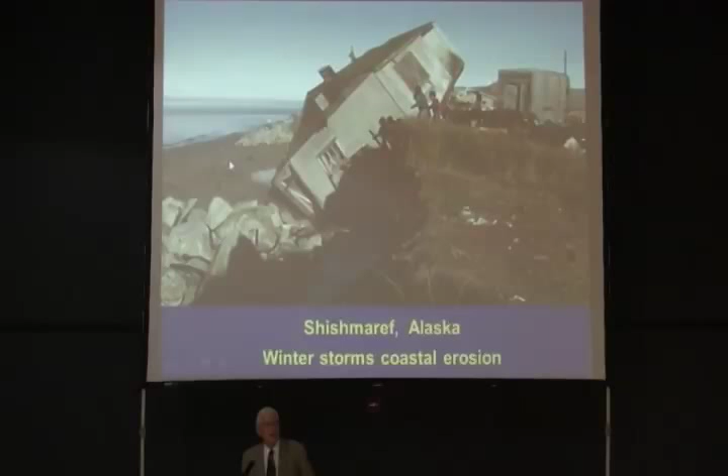Climate change has caused two reproductive seasons for the spruce bark beetle that's wiping out the forests. The ice goes out earlier in springtime, exposing the coastline of Alaska to winter storms, and we're losing probably 10 coastal villages.

This has had a profound effect upon me, a guy who's lived in Juneau, Alaska the last 43 years. I've concluded that our responsibility as human beings, engineers, energy professionals, scientists and business people is nothing less than converting the world's largest industry, energy, from about 85% fossil fuel to at least 85% renewable source energy, literally running the world on renewables as fast as we can, prudently and profitably. There may be some nuclear.

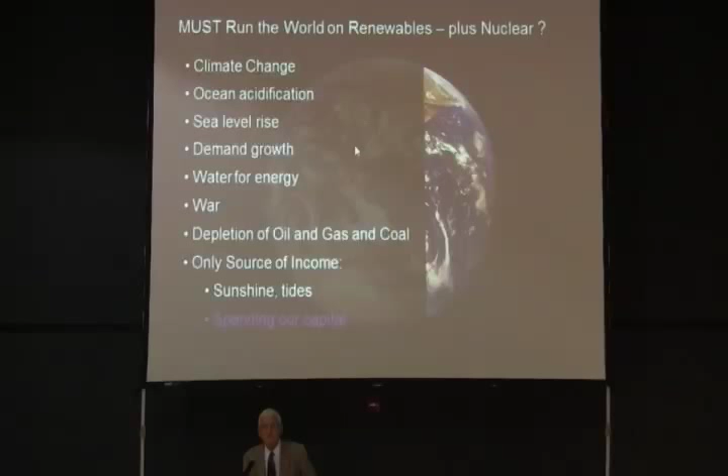It's very hard to predict that now because these problems have become emergencies. We need to move from spending our capital - eventually you'll go broke, what does that mean for our civilization - to running on income.

The only income we have on this planet is solar energy from the sun. This is humanity's total annual energy use, and this is the annual energy input we get from the sun.

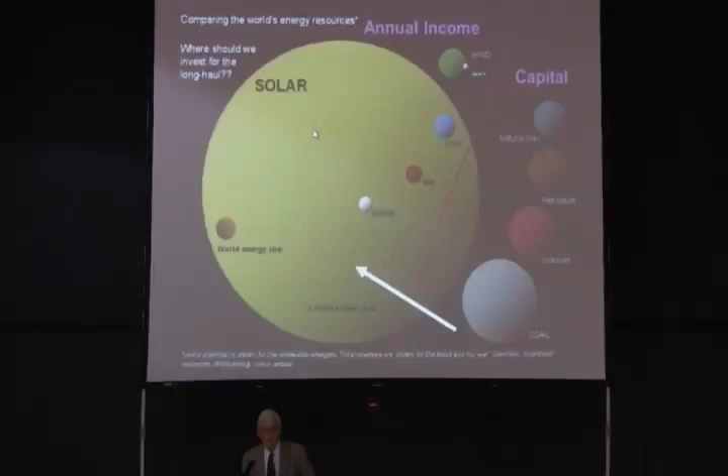I often title my presentations at scientific conferences, like the American Society of Mechanical Engineers, as Running the World on Renewables, Alternatives to Electricity. I ask, can we do this? Can we run the world on renewables entirely with electricity, transmission, storage, and integration?

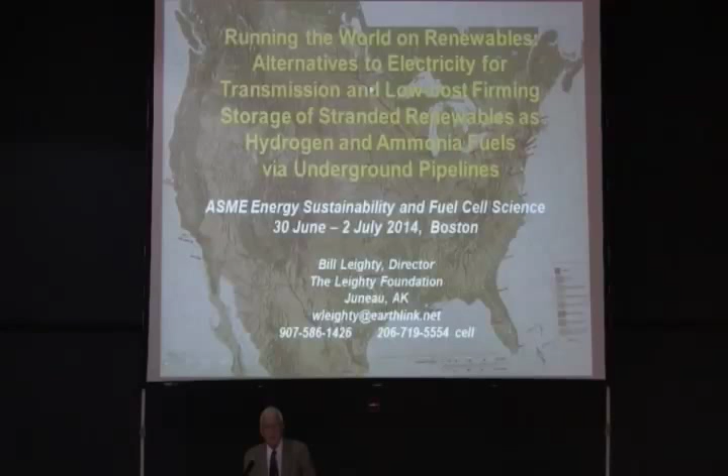And if not, at this time we should at least be seriously considering alternatives - moving that energy around and storing it very inexpensively as hydrogen and ammonia fuels.

The trouble with renewables, of course, is that they're dispersed - they're all over the countryside. There's a very high gathering cost, and then they're remote where the richest resources are, so we have the transmission cost. And they're time varying in their output, intermittent some have said, so we have the firming storage problem.

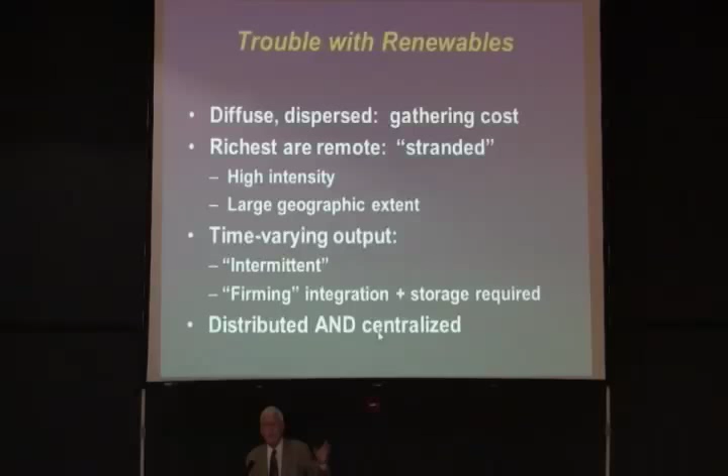In the future, we're going to use both distributed - that's the PV on your garage roof and mine - and centralized large solar and wind plants for running the world on renewables.

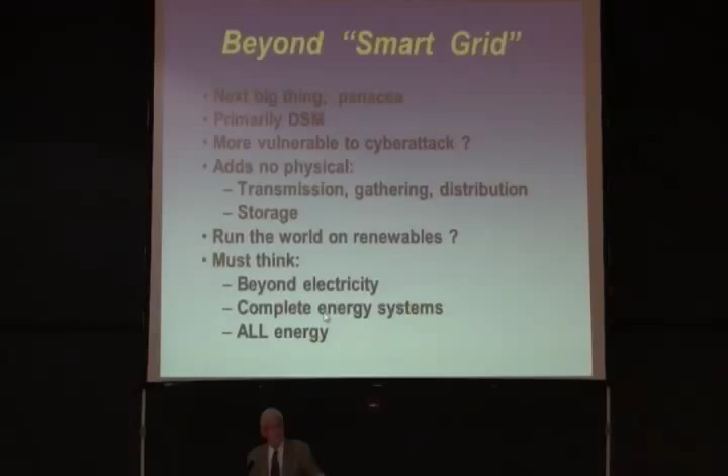Nobody wants to buy a kilowatt hour or a liter of diesel fuel. We want the energy services they provide, to provide all of humanity's energy from renewables.

We need to think beyond transmission as wires. After all, if your only tool is a hammer, the world looks like nails. If your only product is electricity, wind and solar, the world looks like wires. We need to think beyond that.

Low-cost storage is available to us as hydrogen and ammonia. These large anhydrous ammonia tanks we have around the Corn Belt can store energy at 10 cents a kilowatt hour capital cost, and we can store it as hydrogen in solution mine salt caverns for about 20 cents.

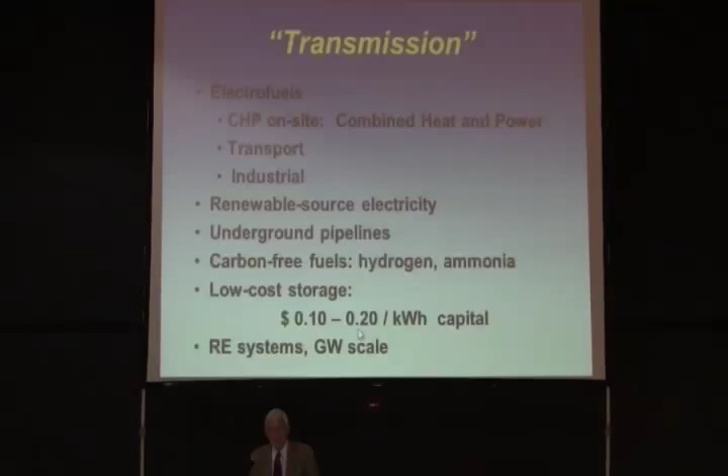So we need to think in the context of complete renewable energy systems, and I just happen to have one with me. Perpetual motion - this has been running on our artificial sun over here.

This is a hydrogen system, not an ammonia system, but we must wonder, is the abundant and low-cost renewable energy of the future going to be available to us primarily as electricity, or perhaps as hydrogen? Because there are many ways of producing hydrogen from renewable sources as well.

Now you can see the sun has gone down. We no longer have energy input to the PV panel, and yet the system is running. So clearly, we've demonstrated perpetual motion at this time, or perhaps there's hydrogen storage in the system. We'll let you place your bets on how long this will run.

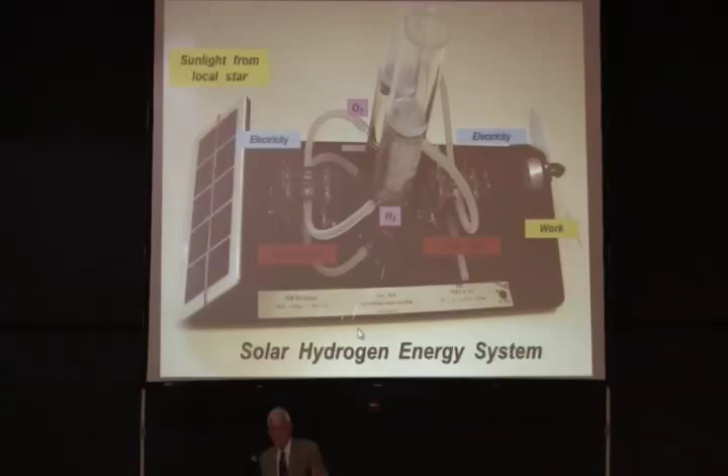The point is, we have to think of complete renewable energy systems. I'm going to present a landscape assessment of what renewable source ammonia looks like now, talk about a project our small company tried to do in the state of Alaska, talk about complete renewable energy systems as we have so far, and discuss a conference I attended in July of this year representing the Ammonia Fuel Association on artificial photosynthesis in the UK.

And then a study that Ag Ventures Alliance, right here in Iowa, hired our small company to do to investigate a wind to ammonia prospect. It's very windy in Iowa. Is this a good place to get started making ammonia fuel?

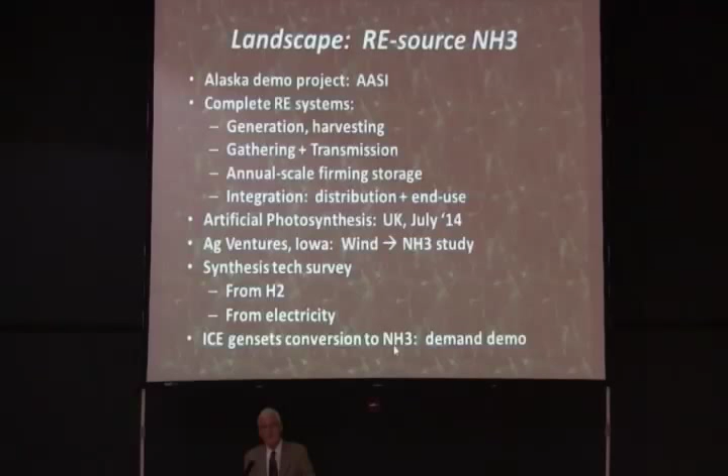From this project, our technical engineering and systems integration company, Wind to Green, took a synthesis technology survey, their own landscape survey, on how to make ammonia from hydrogen and electricity. Then, as a demonstration project, why don't we get our hands on a couple of ICE gensets and have Eddie Sturman or Ted Hollinger convert those to run on 100% ammonia and deploy them in some visible place, working on the demand side of the ammonia equation as well as the supply side.

In Alaska, we have more renewable source energy than any place else on Earth. We have more coastline than all the rest of the US put together. It's very windy out here in the Aleutians, and there's the Asia market not too far away. We also have over 150 energy islands in Alaska. These small communities have no connection to the outside world, no transmission system, no road system.

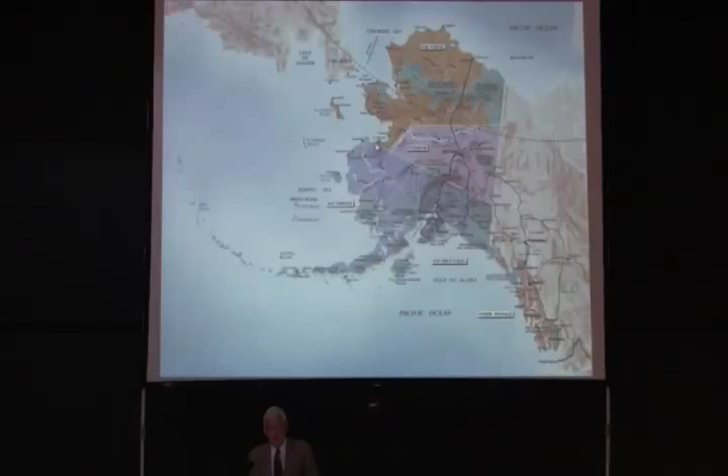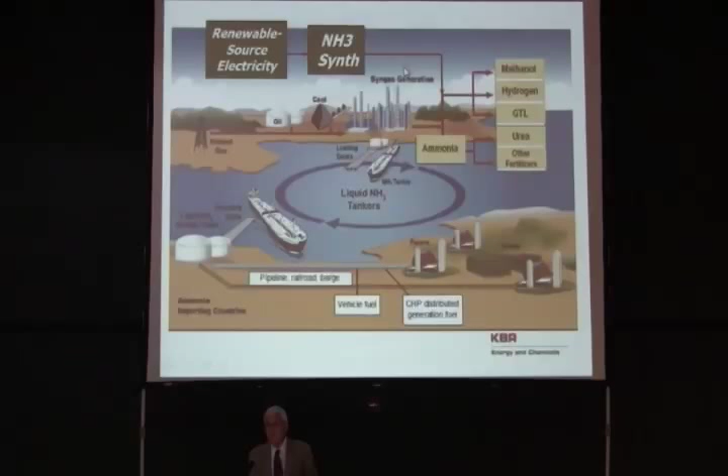They're living on imported fossil fuel for heating as well as for electricity generation. It's typically at $6 to $12 a gallon landed cost. And if we could harvest Alaska's vast renewable resources and convert it somehow from renewable source electricity or hydrogen into ammonia, then we could participate in the global trade.

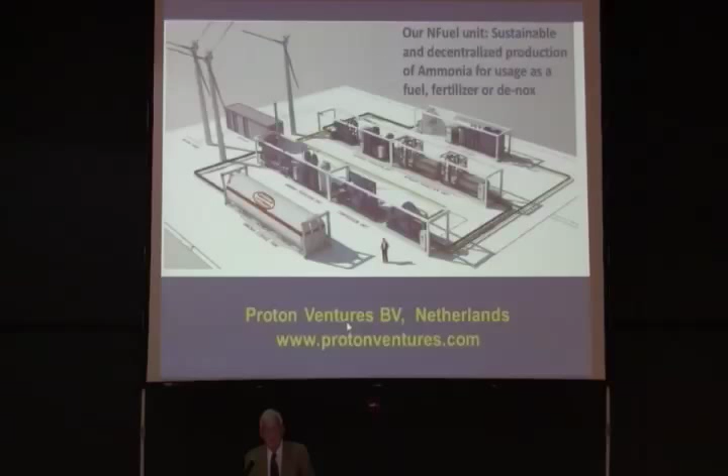In my experience and that of others in Alaska, we can't deploy in an Alaska village, a small community of a few hundred or 1,000 people, a very complex system that electrolysis Haber-Bosch would be. This is the implementation by our friends at Proton Ventures in the Netherlands. It may be wonderfully appropriate in some places, but probably not in an Alaska village.

Therefore, our company proposed to the Alaska Energy Authority several years ago, in response to the funding opportunity they had in what they called the Emerging Energy Technology Fund, that we build a demonstration facility, a small pilot plant in a Conex container, so it would be transportable around Alaska, and it would bring in renewable source energy.

We've got a big switch here. Either we switch it up here and convert it into renewable source ammonia and store it in a steel storage tank, or we flip the switch the other way and we run the ammonia from the storage tank through the ICE genset and put it back into the local renewable energy grid, demonstrating that this could be done economically, technically, feasibly at the village scale.

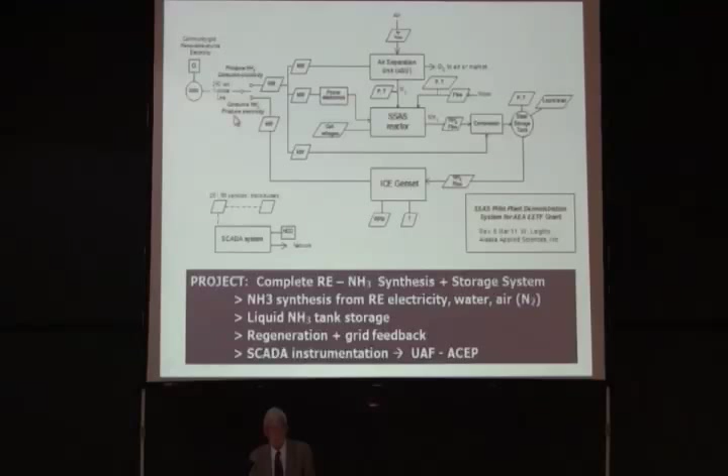Now this would have only been a few kilowatts input. It would just been a pilot plant to demonstration, concept to demonstration. It was a $1 million project.

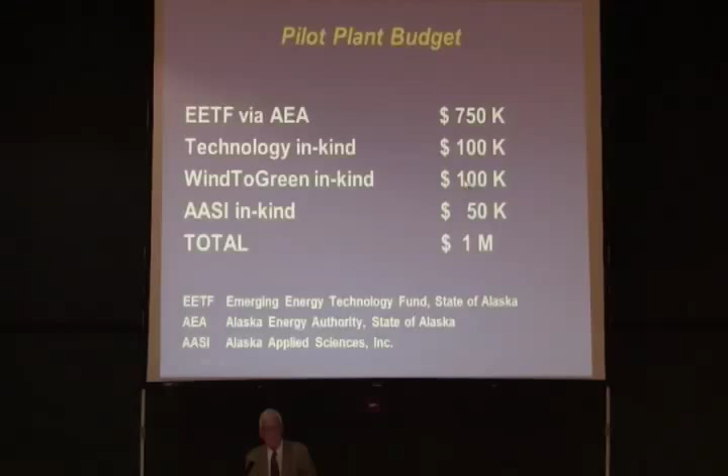This is $750K our company was designated to receive from this Emerging Energy Technology Fund program. The technology supplier would have to put in $100K in the proprietary components by which the ammonia would be synthesized, and then our system integrator designer would put in $100K of IP in the reactor design. We would put in some management, and it came to be a $1 million project.

Unfortunately, the technology was simply not available, and we had sold this project to the selection committee by saying, we understand you want TRL4, technology readiness level. You said that. We think the technology we're proposing is at TRL 2 or 3. If you'll select our project, we will agree not to begin the project, not to sign the grant agreement until we've proven that the basic technology works. And since we didn't, we couldn't get to milestone 1, so we gave the money back essentially on December 11th of last year.

But Wind to Green, our system integrator, said, let's do a technology survey of all that's available and other ways. There are many ways, as we've already heard today, of synthesizing ammonia other than the Haber-Bosch method. And darn if every report they came up with didn't conclude with, we need better catalysts, as if there's some sort of needle in the haystack out there that can be found if we only had a more powerful magnet.

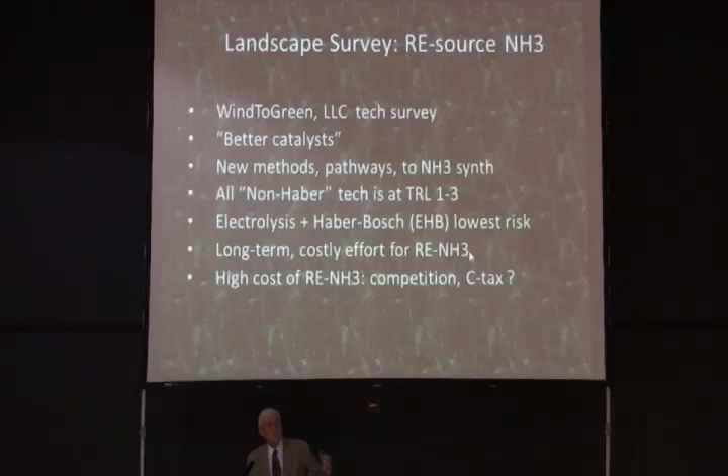So there are many new methods and pathways to ammonia synthesis, although all of them seem to be stuck at the TRL, technology readiness level 1 to 3. And therefore, the lowest risk at this time is electrolysis plus Haber-Bosch, which we abbreviate EHB. It's going to be a very long haul in money and time to bring some of these other technologies to the point that they're of high technology readiness level, ready for commercialization. Many of these are going to result in high-cost ammonia at the plant gate.

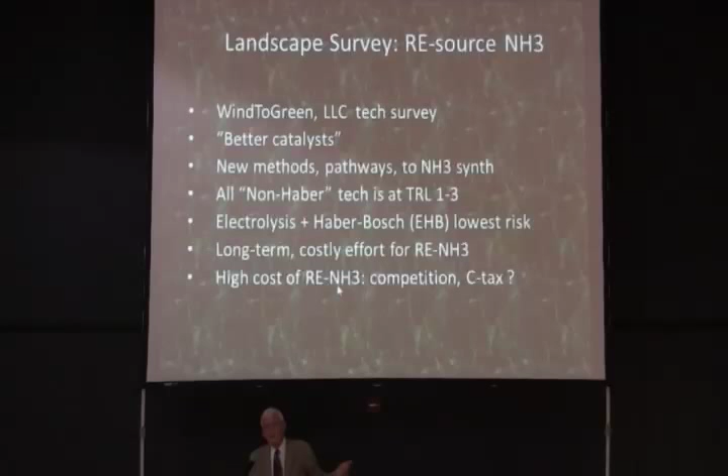With what will it compete? Will it compete with brown ammonia made from natural gas, long-term contract, $1 or $2 per million BTU stranded gas in Australia? If it can't compete, what's the point? What's the market? We have to have markets.

We don't know whether the sources for ammonia synthesis are going to be primarily electricity or primarily hydrogen. If we have hydrogen, great, we can go directly into Haber-Bosch or some other synthesis method. If it's electricity, we're probably going to have an electrolyzer in the system.

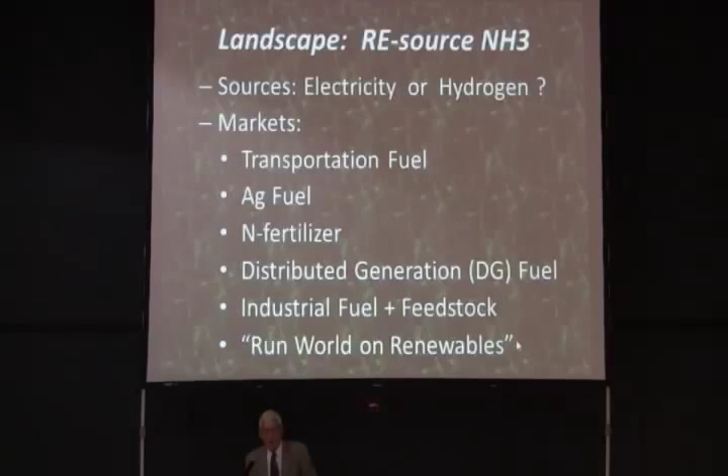Here are the obvious markets. We've talked about many of these, and all of these combined would point us on the way to running the world on renewables. There are many carriers and storage strategies for renewable source energy.

Obviously, electricity, gaseous hydrogen in pipelines, where the pipelines themselves are storage because you can pack the pipeline pressure.

Ammonia, and the Japanese have a very interesting concept of moving hydrogen from stranded locations, carbon-free, to Japan as a cycle on commodity tankers on the sea, starting with toluene, hydrogenating it at the renewable source to methylcyclohexane, C7H14, returning it, dehydrogenating it on the ground in Japan, putting it back in the tanker and moving it around. So mole for mole, liter for liter, you're bringing hydrogen to the home islands.

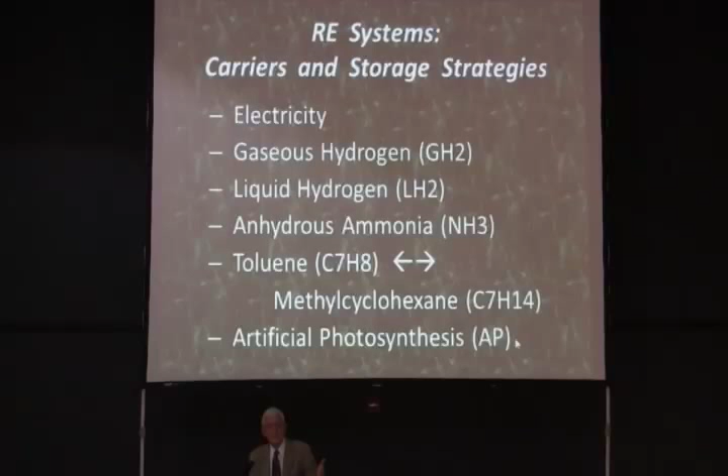And artificial photosynthesis, the first step in photosynthesis is water splitting. You're making hydrogen and oxygen. So is that going to be some way a source and a carrier and a strategy for moving renewable source energy around?

The organizer of this conference, Tom Faunce from Australia, invited John and Norm to send somebody representing the Ammonia Fuel Society to this meeting of the Royal Society. You might remember that's Isaac Newton's group at Chicheley Hall in the UK. This was our venue. It was tough to put up with, but that's where we were.

Their title was a Global Artificial Photosynthesis Project, trying to avoid the IP fights that have emerged and have stalled progress on so many other technologies as the lawyers and the patent trolls go after each other.

The title of my presentation was, what shall we do with the photohydrogen that you would make, you artificial photosynthesis people, as the first stage in your process? Do you want to take CO2 out of the atmosphere and make hydrocarbon fuels? If so, they can only be used in Carnot engines with relatively low efficiency. Or shall we sell the hydrogen directly? Or shall we make it into ammonia so it's more economically transported?

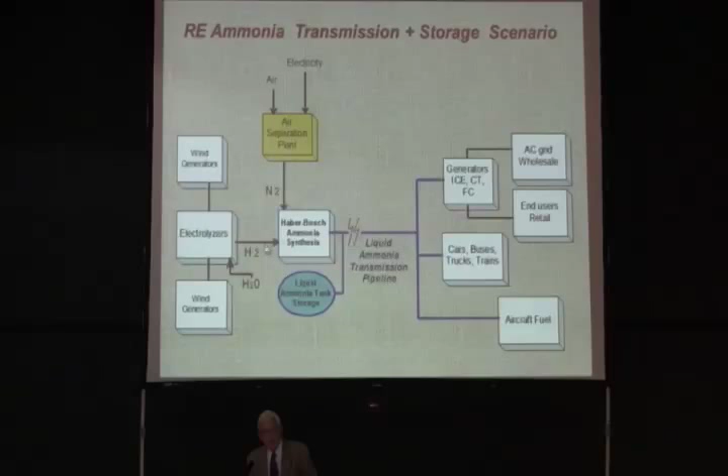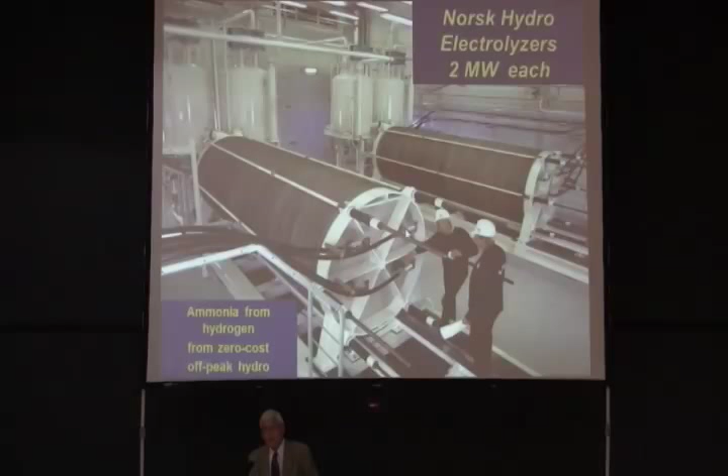This is the obvious way that you would make ammonia. Wind or other renewable source generators, make hydrogen, air separation unit, transport it by pipeline to distant markets. The electrolyzers have been available for a long time, and they're becoming available again in sizes and configurations that would be convenient for this purpose.

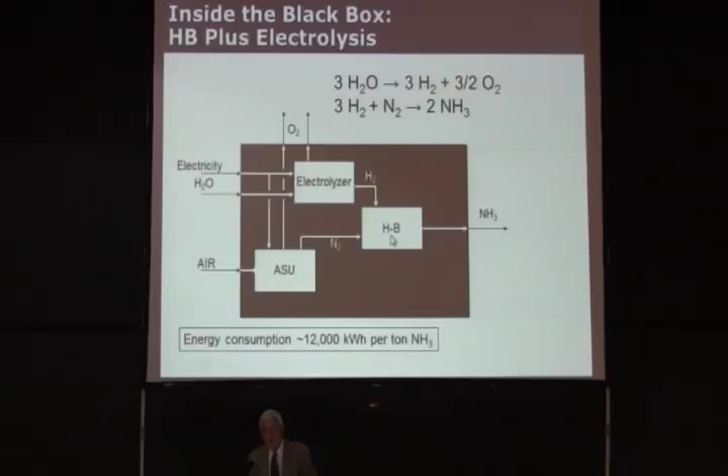Electricity and water come into the electrolyzer, nitrogen from the air separation unit, Haber-Bosch reactor, and out comes the NH3.

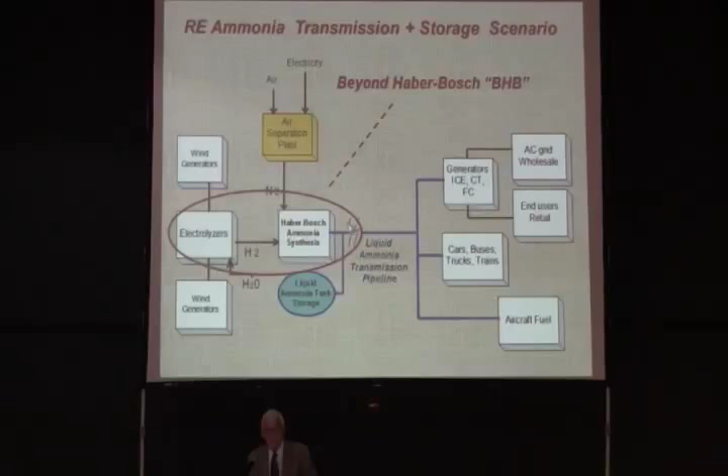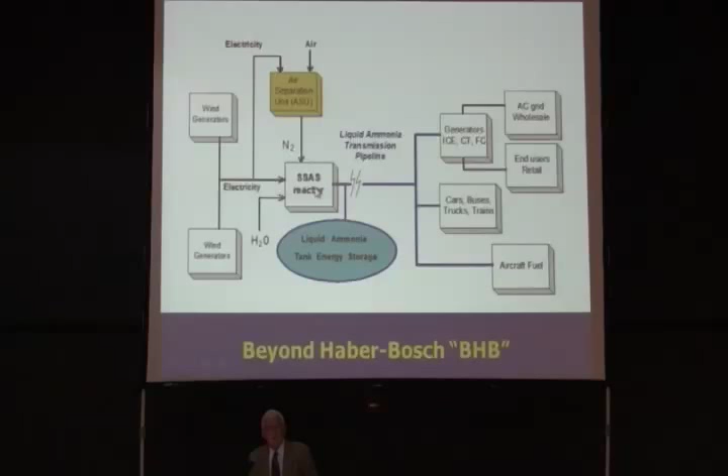If we could combine these two in some sort of technology beyond Haber-Bosch, we've coined the term BHB. Everybody has to have an abbreviation, beyond Haber-Bosch. Whatever this technology is, now it becomes a lot simpler. This is the term that John's group uses, solid-state ammonia synthesis, some sort of a reactor that's beyond Haber-Bosch, so that we don't suffer the high temperatures and pressures that are necessary for the Haber-Bosch process.

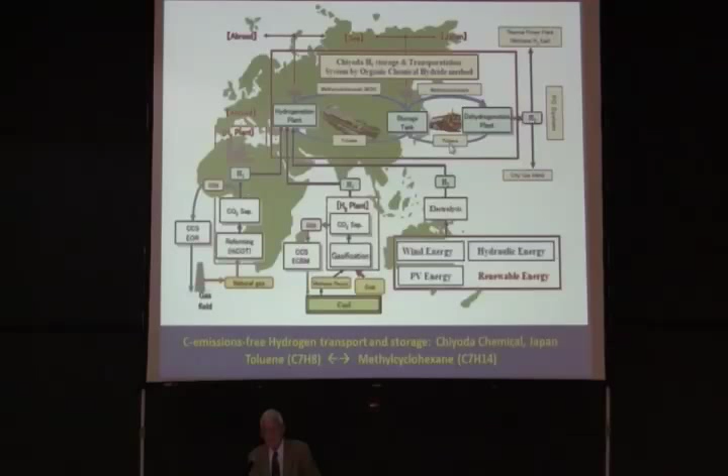Here's the cycle that the Japanese, via Chiyoda Chemical in Japan, are proposing, where they have a hydrogenation plant, this could be floating wind machines in the Aleutians in Alaska, to a tanker carrying methylcyclohexane to a storage tank in Tokyo Bay, say. They dehydrogenate it and send the toluene back around to be rehydrogenated at the renewable energy source.

So Wind2Green convened a technology advisory group. Jack Swearingen is a friend of John's and a retired national lab scientist, and he's got a lot of buddies that needed something to do. So they convened this group to do a landscape assessment of the other technologies out there. They did a literature search, of course, and then they followed up with personal contacts with some of these researchers.

Nafion is not particularly good for that. This is the polymer primarily used in PEM fuel cells for hydrogen fuel cells for cars, but it's an acid and ammonia eats it, so that's not compatible. But there is an ammonia-compatible polymer proposed by the University of Minnesota, so perhaps there are solutions available.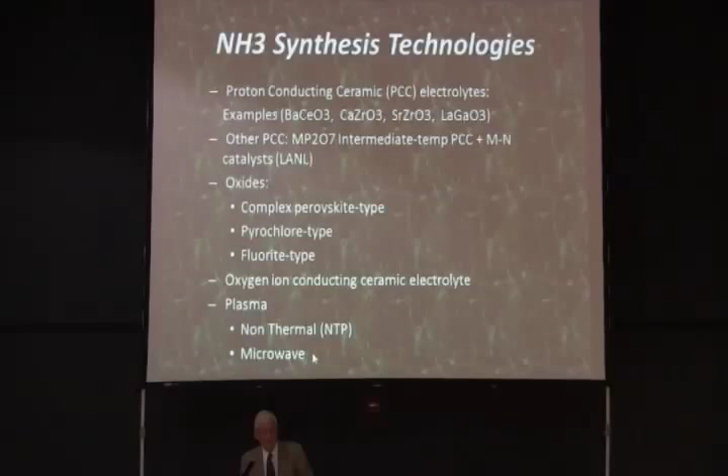Plasma, non-thermal plasma, and microwave plasma. Some of these would be packaged in configurations that look like solid oxide fuel cells, high temperature, high pressure, electricity in and ammonia out. We've heard about molten salt electrolyte, ionic liquid electrolyte. A gentleman, professor at the University of Wisconsin-Madison, says we put diamond nanoparticles on the surface, then we can get very small catalyst particles to cling to that, and the diamond itself is a catalyst, so it's another potential method.

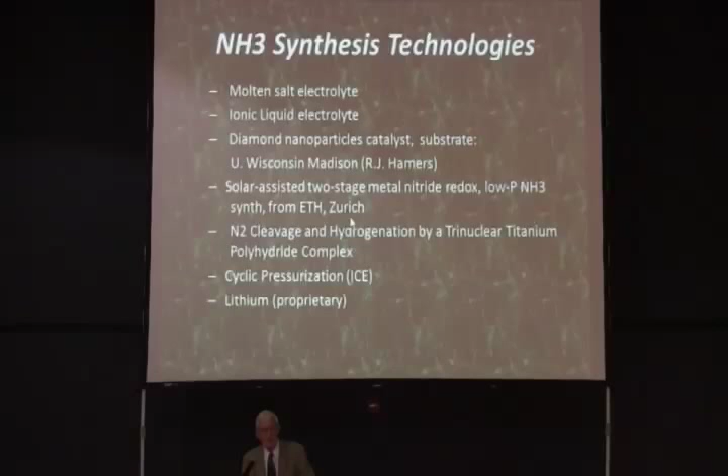These two are a little hard to pronounce. This one is from Japan, this is from ETH in Zurich. I really don't understand what these technologies are, but they're in the catalog. Cyclic pressurization - if you had an ICE with very clever and intelligent valves, could you compress the hydrogen-nitrogen mixture enough that you would synthesize ammonia right in the cylinder? And a proprietary method based on lithium.

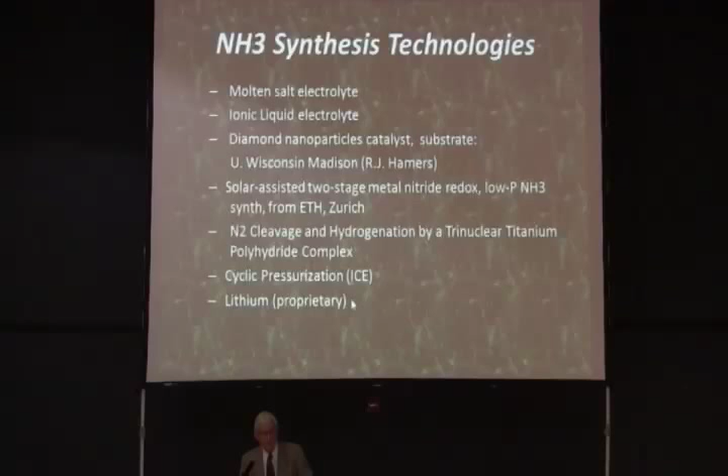What if we had hydrogen to feed our Haber-Bosch process from artificial photosynthesis? This is exactly what the Joint Center for Artificial Photosynthesis at Caltech is looking at. They're doing a catalyst search, sort of a needle in the haystack random search, to try to find something by accident that is a better catalyst for the water splitting with photons reaction.

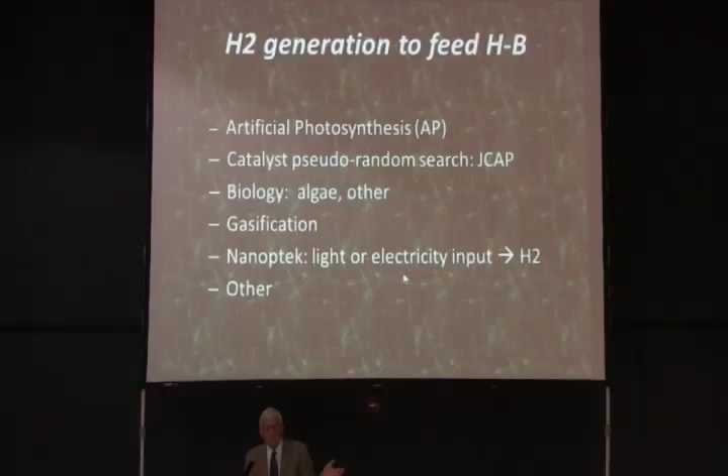Biology produces hydrogen, gasification. Here's a small company that appeared at one of the conferences I went to. They have a proprietary catalyst on a titanium sheet that produces hydrogen with either light or electricity input, or both. And there are probably many others out there.

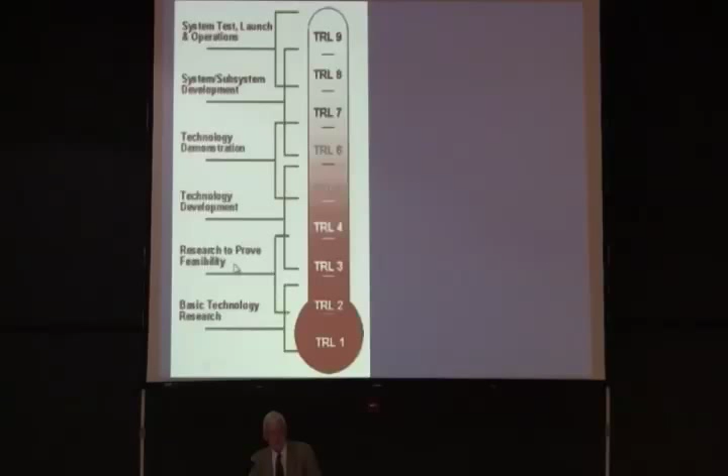But they're all stuck down here somewhere in TRL 1 to 3. Research is necessary to prove feasibility. That sounds tough - sounds like money and time, doesn't it? And here are the definitions.

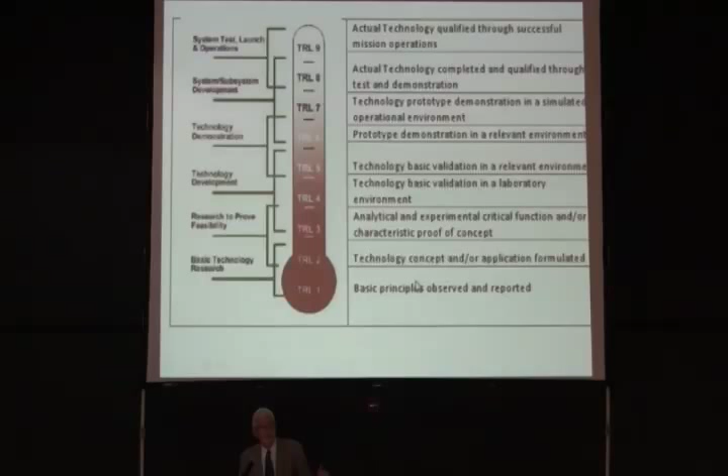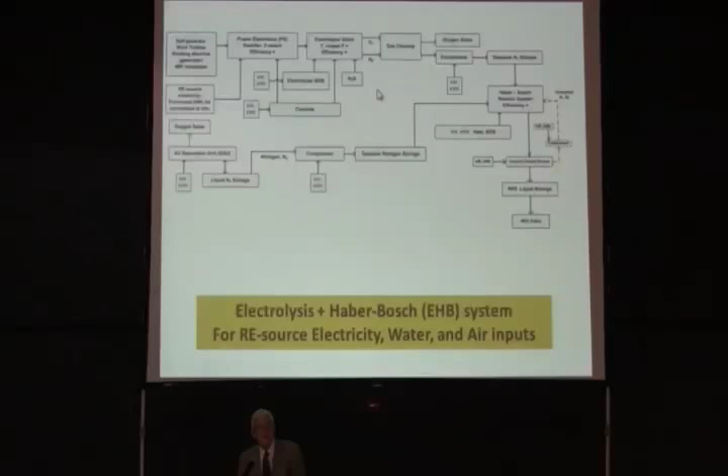This is something that was invented, you're probably familiar with it, by NASA to try to filter the wheat from the chaff and things that might be useful to them. This is the definition that I proposed to my client, the Ag Venture Alliance in Mason City, when they said let's do a study of electrolysis Haber-Bosch from wind to ammonia. I said this is the electrolysis Haber-Bosch system as I understand it.

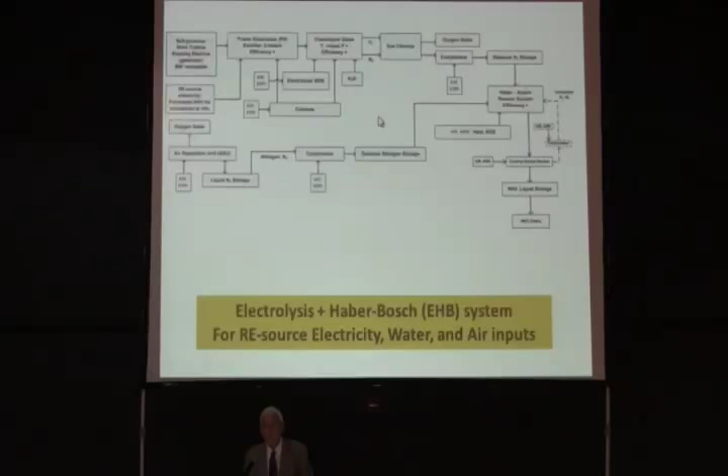Sorry you can't read it - it's on my presentation, which you're welcome to take off the thumb drive with you. One of the best resource papers is this catalog of technologies published in the International Journal of Hydrogen Energy, I think. This has become a major reference resource.

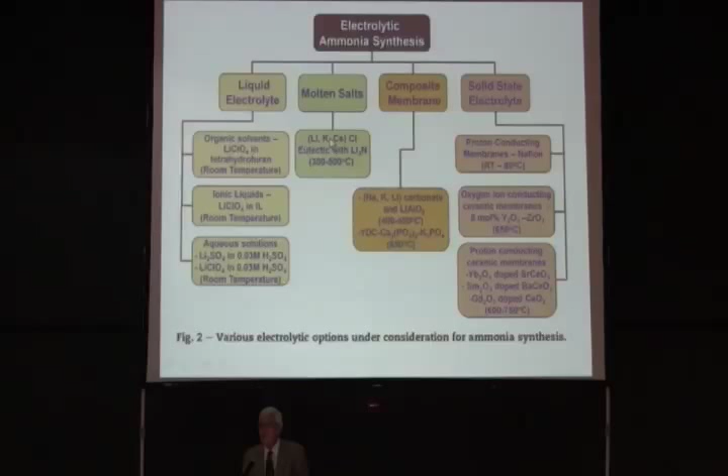So here are the electrolytic ammonia synthesis methods - many different ways and many variations within that. My point is that there are many emerging technologies that are going to need a lot of time and money to finish. So these are some brief looks at what the basis of these technologies are. You're familiar with a lot of these.

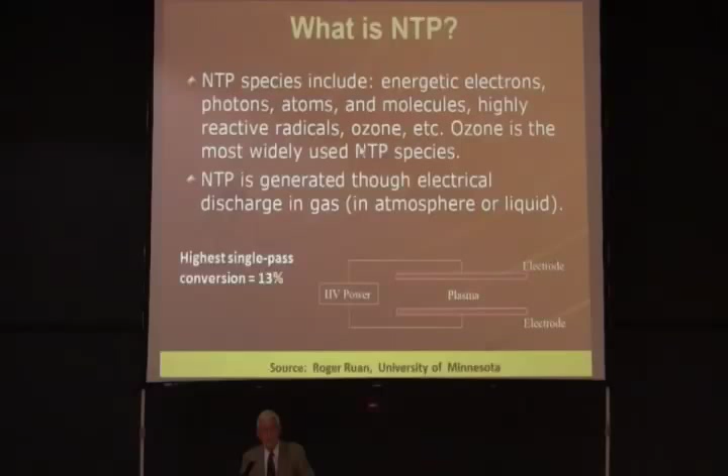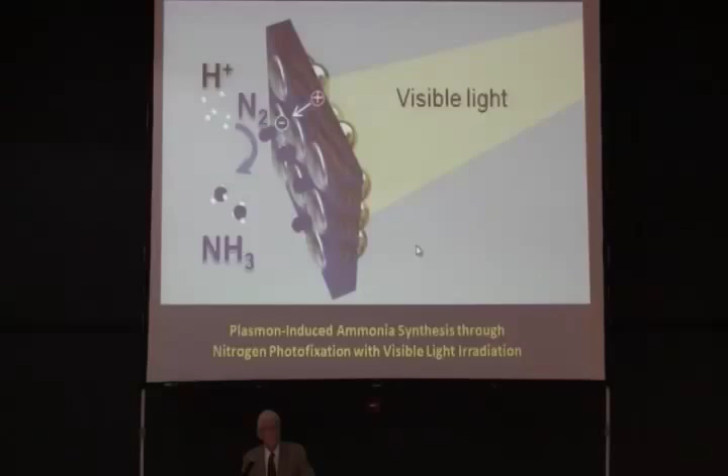This is what NTP looks like. Non-thermal plasma, solid thermochemical, plasmon-induced ammonia synthesis. Some of these are not familiar, and they may be promising.

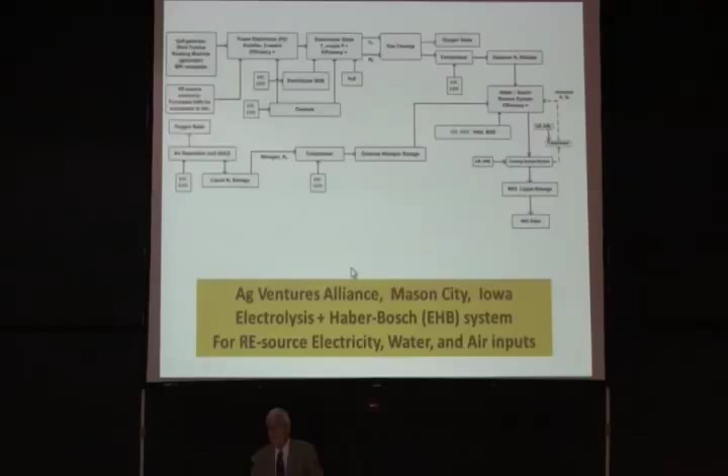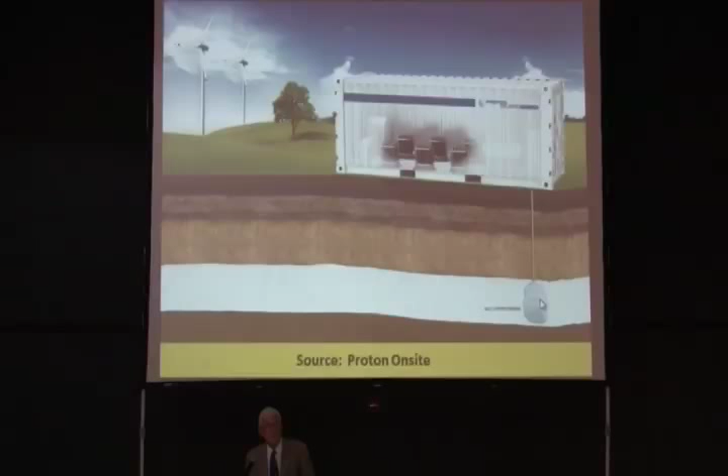So this is the study that I did for Ag Ventures Alliance. Part of the study was putting together a simple Excel model based on something that would look like this. Here are the wind machines, here's the ammonia synthesis. In Iowa, you don't have salt geology for inexpensive storage, but there would be some other kind of storage of the ammonia itself. Here they're storing hydrogen, which then would act as a buffer for a system like this.

I was assigned the price of $650 as the plant gate price for ammonia produced from wind energy in Iowa, as if this is the benchmark retail price - good as any - that prevails in Iowa at this time, $650 a ton retail to the farmer. And as you can see, it's varied over the years.

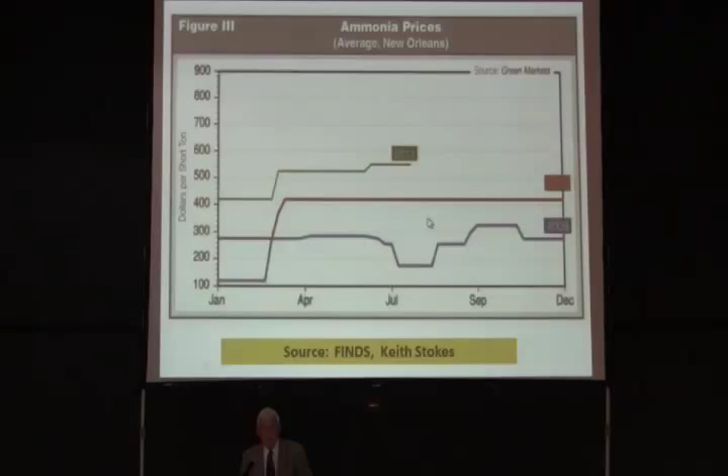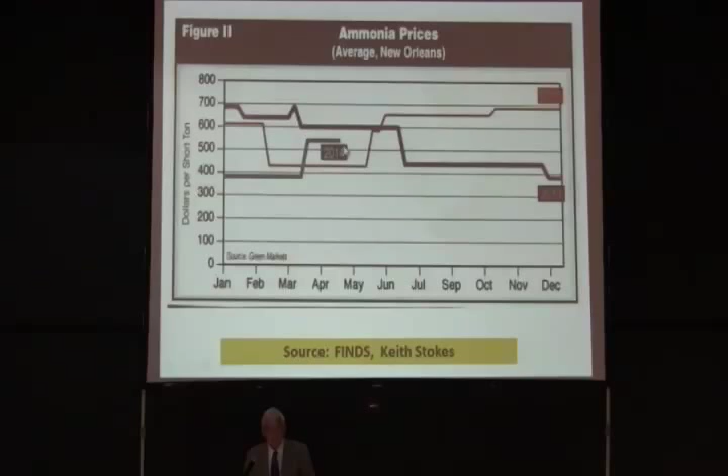This is from Keith Stokes' group, FINDS - it's a very nice publication. You can see the prices varied - here's 2012, here's 2013 and 14. Here we are today, 2014, $550 a ton. Those of you who know the ammonia market in Iowa might know better, but it is possible to track these prices. That's at the terminal in New Orleans.

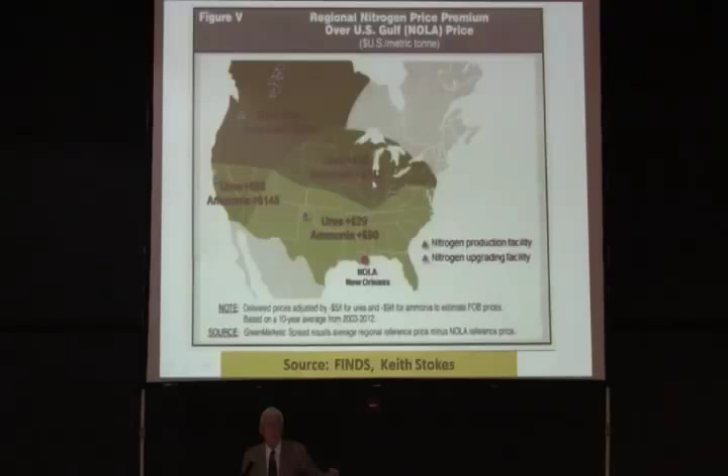Here in the Corn Belt, you add $142 to that average for the cost of getting it to Iowa, transmitting up the Mississippi on barges or in pipelines, and then selling it at retail. So that's where we get close to the 650.

I analyzed two cases based upon this simple Excel model I put together. We handled the capital expenditure, which can be very complicated depending on the ownership of your capital assets, by simply saying: tell us what capital recovery factor we should assume, somewhere between 8 and 18%. That includes the cost of capital, whether it's debt or equity. It includes overhead and other O&M costs. It's a very simple way of trying to establish whether something is reasonable or not.

So this would be the total annual cost. Case A is if your enterprise owned the wind plant, so you are making your own electricity and then converting it to hydrogen and ammonia from your wind plant. Case B was, let's assume we can buy all the wind energy we want at 5 cents a kilowatt hour, or solar, whatever renewable source energy.

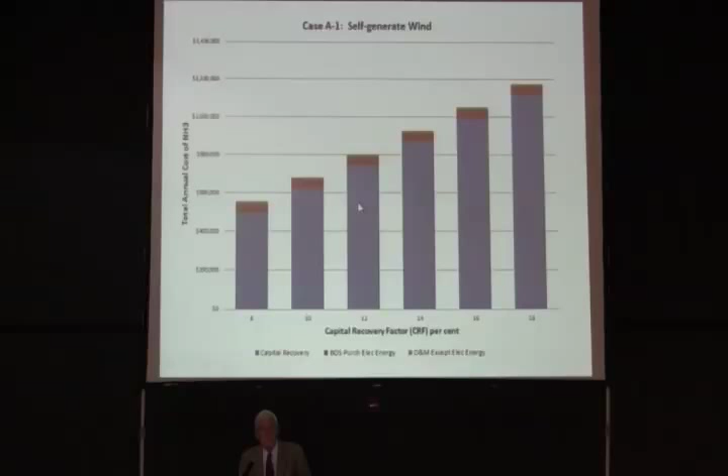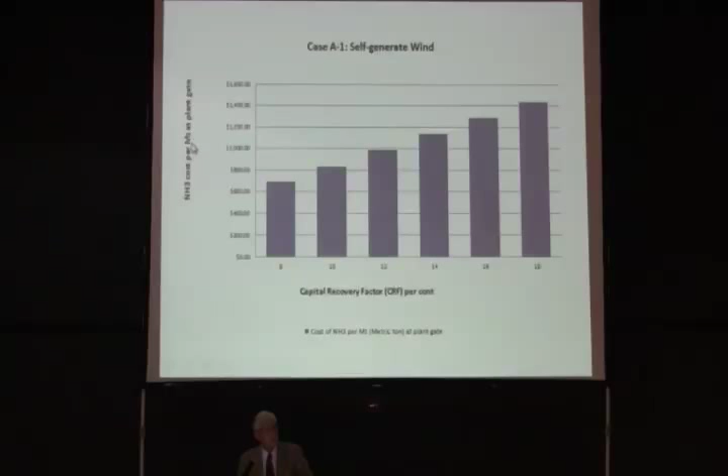So you can see most of the cost is in capital recovery. There's no fuel cost because they're not buying much energy. Depending on your capital recovery factor assumption, you're somewhere between $650 and $1,400 a ton. This is the cost per metric ton at the plant gate. So you're barely competitive, maybe down here, if you can assume a low capital recovery factor for your enterprise.

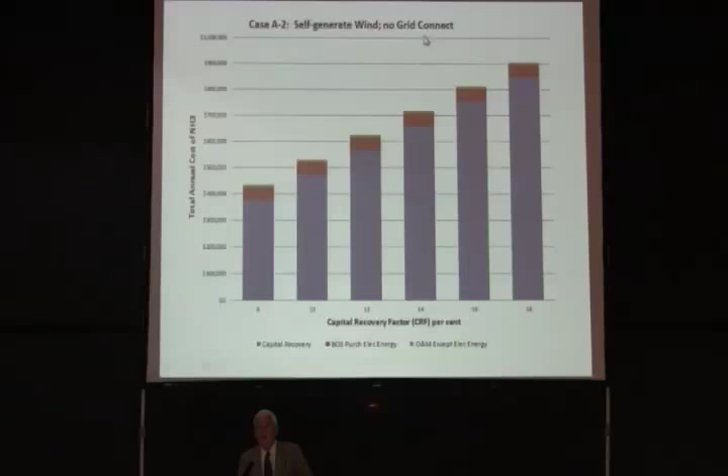What if there is no grid connection? If we're going to supply all of our energy to our ammonia plant and not sell any to the grid, we can save a lot of money by not putting the infrastructure in the ground and the substation and the transmission line.

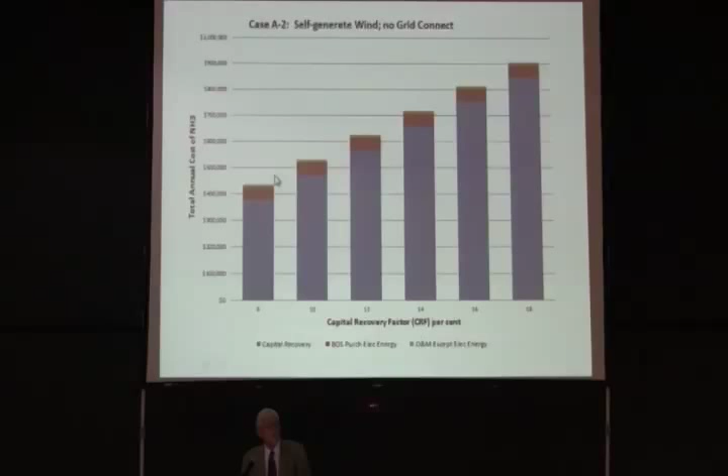So the costs go down if we don't have to put in electricity infrastructure. When you have a universal Excel model, you can do a lot of what-if cases, an infinite number of them. What if we self-generated? This is self-generation, case A2, no grid connection. So now your cost of ammonia at the plant gate is below $600. Maybe this is beginning to look competitive.

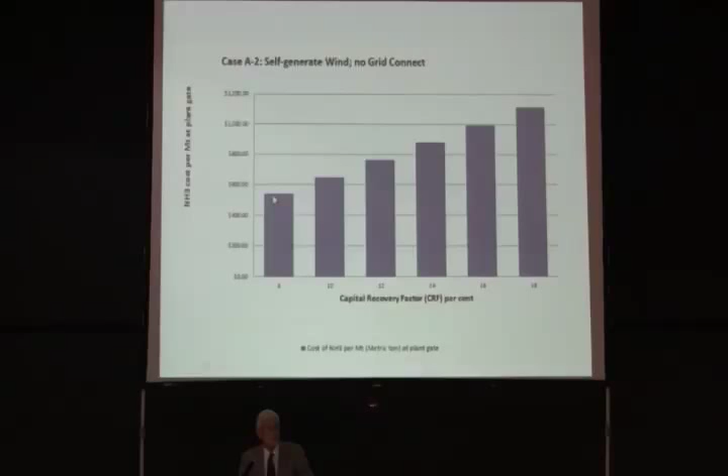But all the other assumptions in there are mine. They're not based on the market survey because there's very little information available.

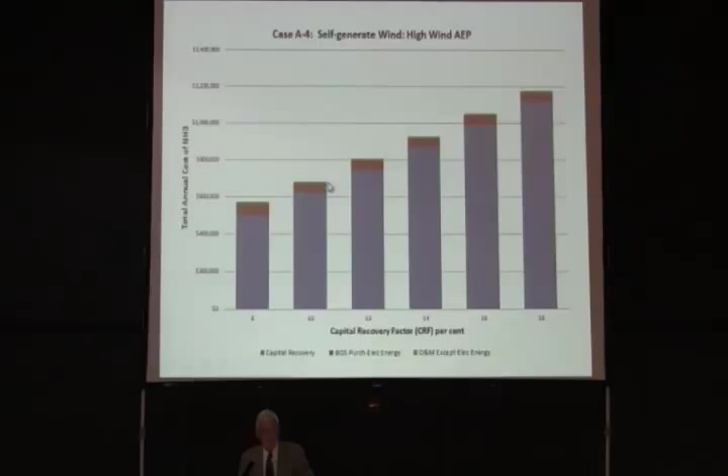What if we have a high wind resource with a very high annual energy production from the wind? Now the costs go down. And the selling price, now we're down below, slightly above $500 a ton if we have a high, rich wind resource.

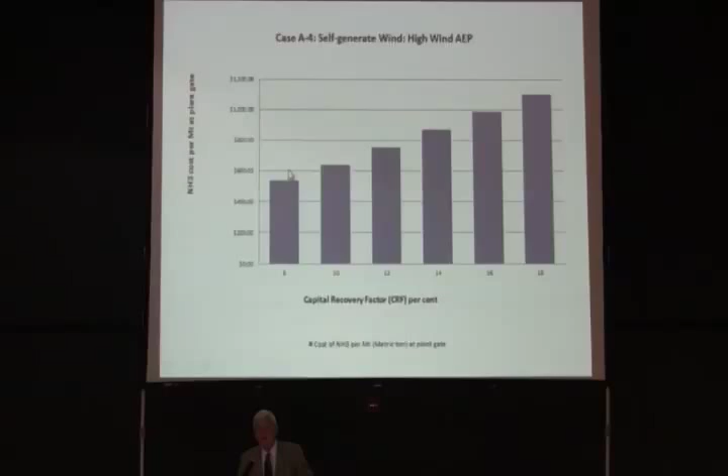Case B, what if we buy all of our wind energy at 5 cents a kilowatt hour? We don't own a wind plant, we're just buying it from those who have it. So now most of our cost is in the cost of buying the wind energy. Here's our capital cost down here.

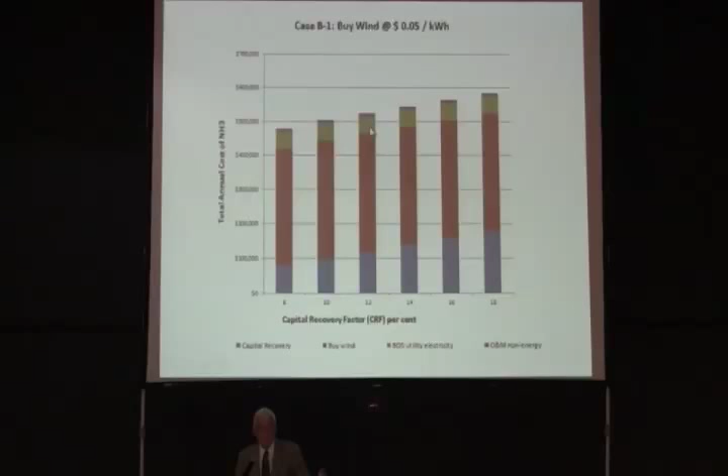We have to buy some electricity now just to keep the lights on and keep the control systems running because we're not making our own electricity. We're going to have to buy that from the local utility. We can't buy it from our wind supplier because sometimes the wind is not blowing. So that's one of the assumptions we made. And this is O&M cost up here.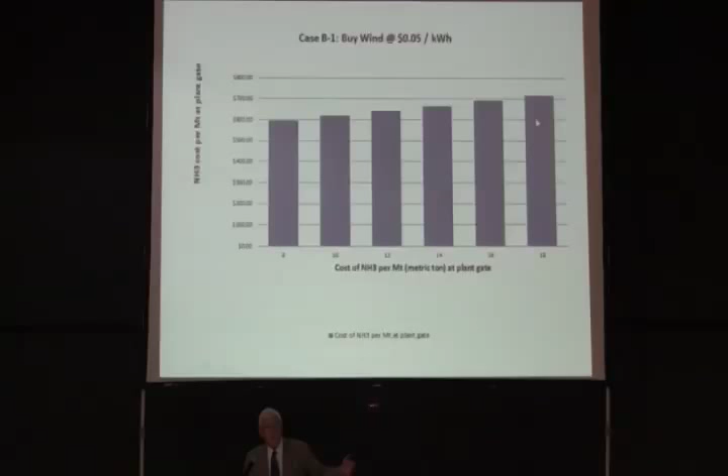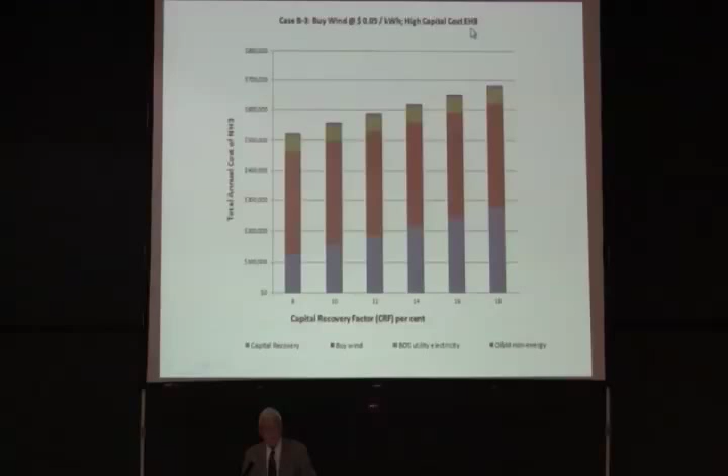So now our cost, if we're buying wind, for the ammonia delivered is somewhere between $600 and $700 a ton at the plant gate. Now this is green ammonia. If there's ever a carbon tax in the future, or if some customer is willing to pay a premium, like Google, to run a server farm so that they look green for our green ammonia, then maybe this is a competitive price. Here we assume that there's a higher capital cost for the EHB system than I had otherwise assumed, or higher than if the capital cost of the electrolysis Haber-Bosch system is greater.

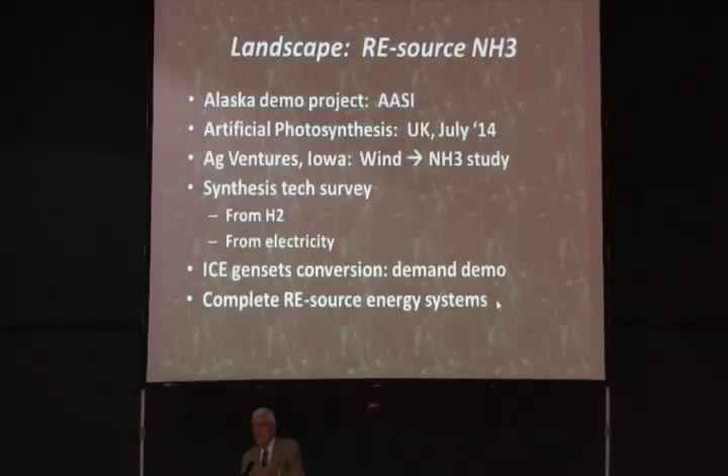So this is our landscape assessment, what we've looked at today in our brief journey through the future of renewable source ammonia. It would be very good to have some ICE gensets so that we could then talk to people about complete renewable source systems, from the sources to energy services delivered, not just the kilowatt hours or liters of ammonia.

The Haber-Bosch reactor at this time looks like the only good candidate for making renewable source ammonia from either hydrogen and nitrogen, or from renewable source electricity via electrolyzer to hydrogen, plus this should be N2. We need to deploy in Alaska a simple system, not a complex system. At megawatt input scale, our analysis should be focused, because that's the increment of wind energy.